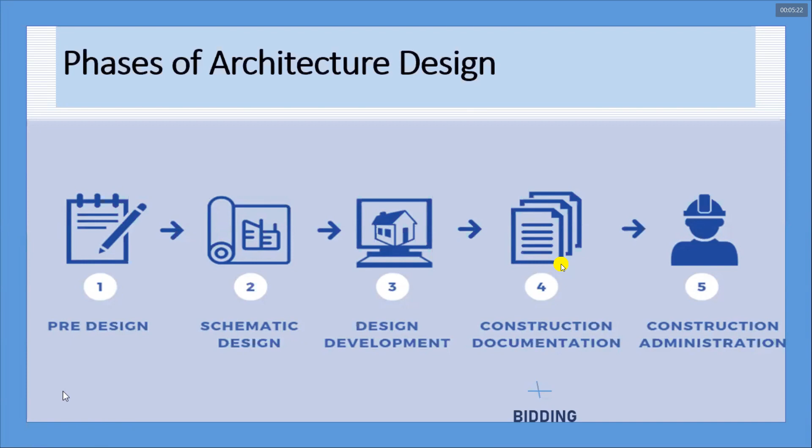Okay, so who are the stakeholders that the architect needs to collaborate with? He needs to collaborate with the client, engineer, and builder. The engineers are involved right from the start of the third phase, that is design development, construction documentation, and construction administration. But the builder or contractor is involved in the last two phases, which are construction documentation and administration.

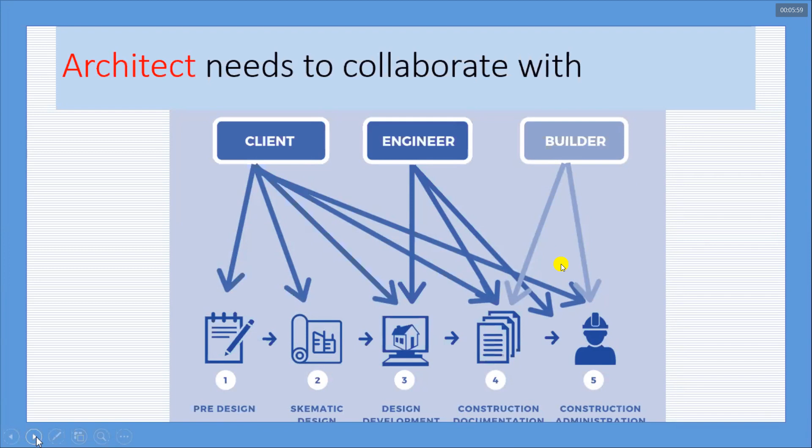So apparently the flow seems very simple and straightforward, but the truth is that the stakeholders involved in each aspect of the process have different thoughts, different perspectives, different expertise that are necessary to create a successful product. So it is not possible for them to design individually. All of them have to understand the significance of the profession of other consultants, and they have to manage all together to make a building successfully executed.

So let's define the phases one by one. The scope of the project will be reviewed. The program and analysis of the site is actually part of the pre-design phase. Zoning requirements is the new term. Zoning requirement means that if there is any plot or site on which you have to execute your building, you are supposed to zone that plot initially, according to your requirements.

For instance, you have to find out where to locate your building, on which part of the site. Then you have to locate where you want to add the parking area, where you want a lawn area. So all these parts are used as a zone. So you have to divide your site into different sections.

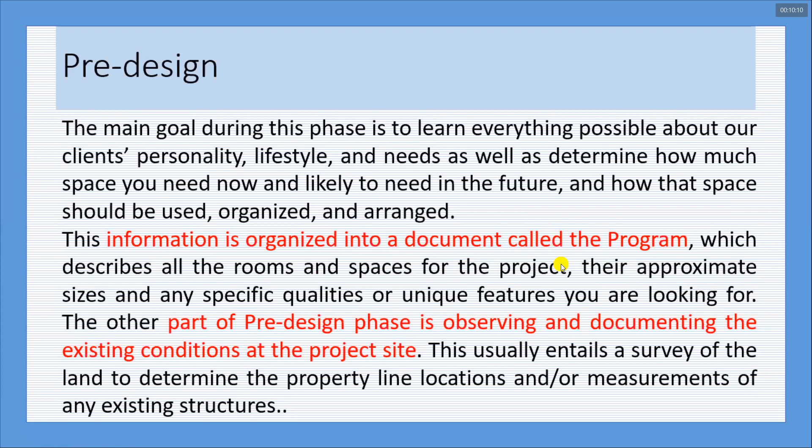So the main goal is first of all to gather information about the client, his personality, living style, his likes and dislikes regarding any space quality, arrangement of spaces, and what are his future perspectives about the design. This information is then organized into a document which is known as the program. It describes the standard sizes of rooms and spaces. It also provides any unique feature.

For example, if someone wants to add an aquarium or an open green area or a patio to their living room, it's a unique feature that you have to add. So such preferences are added in the design. This phase is observing and documenting the existing conditions of the site. For example, demarcation or measurement of the existing structure within the site.

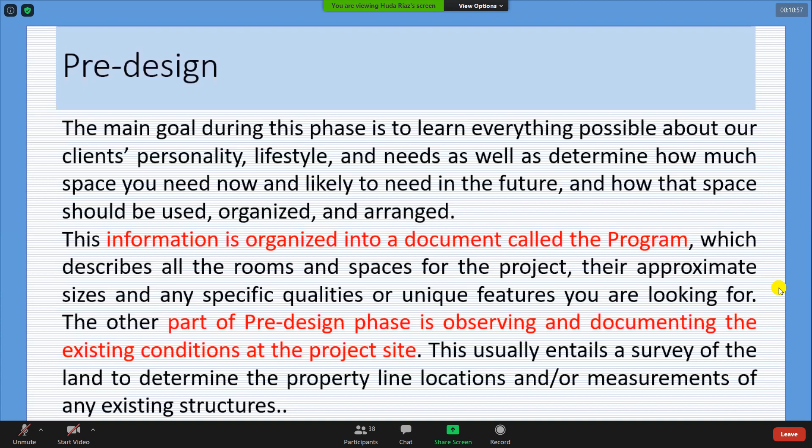Then analyzing the surrounding area, climatic condition, the local people living in the surroundings, rules and regulations that affect the project, for example, height specifications of the building, or according to the site, you have to see the bylaws. Then you track the zoning summary. We have already discussed what zoning actually is.

Then you have interviews with the client to understand in more detail what he actually demands, and sometimes you give him home assignments as well so that you can better understand and design in a better way what he actually demands.

So here we have deliverables. Deliverables are actually PD deliverables. They show what documents you are collecting by the end of this phase. And the next, PD duration, is the time you require for the completion of this phase, that is roughly 1 month or 2 to 4 weeks.

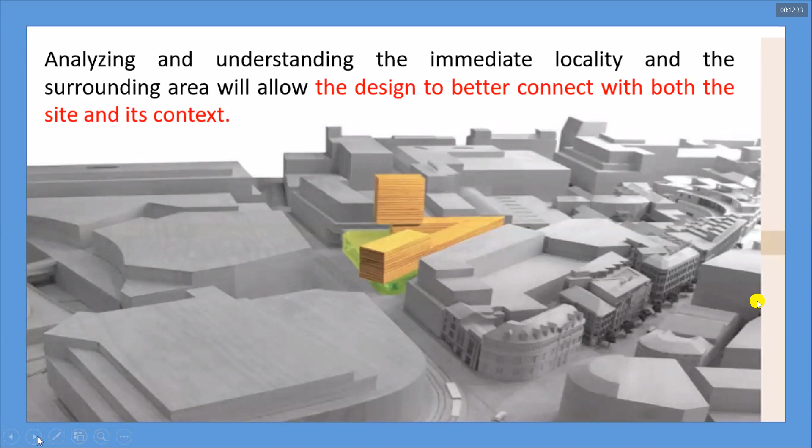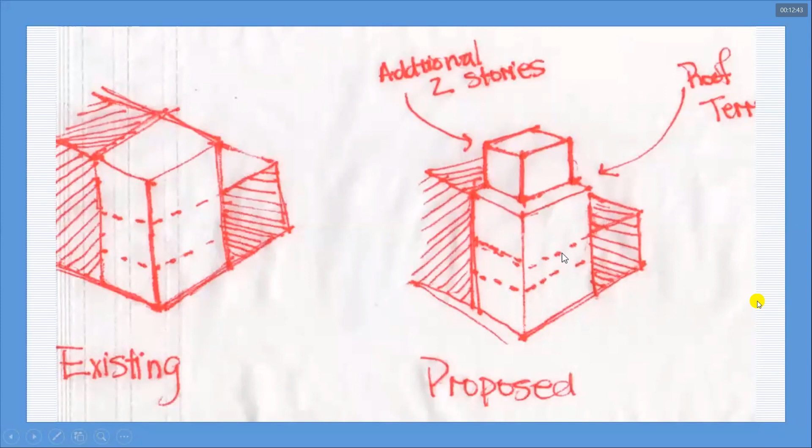So the next phase is schematic design. After the architect's preferences, the process enters schematic design, where he explores the chosen concept in more detail. Here, the architect will develop plans, sections, elevations, and draw them at a particular scale so that it can be seen that the program and the site have a good relationship with one another. Then you evaluate how your building will actually look by the end.

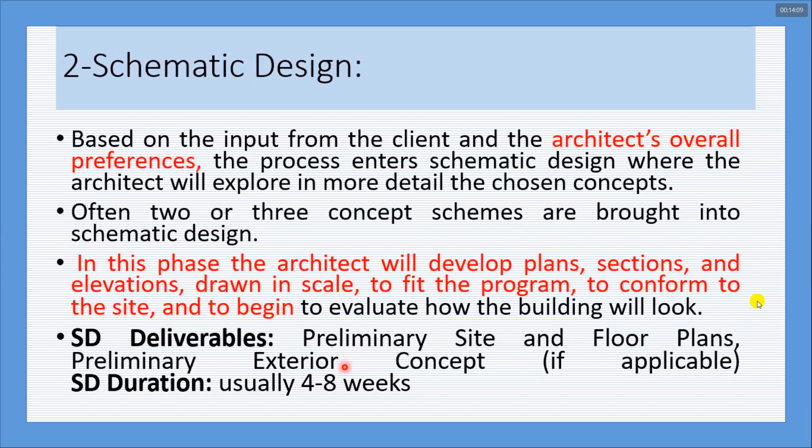In this phase, you deliver an initial draft of the site, an initial draft of floor plans, even the basic exterior concept of how your building will look, and it will take mostly 4 to 8 weeks. Sometimes you find perspective drawings. They are handmade 3D drawings, or sometimes, for the client's better understanding of the building concepts, you provide simulated 3D models so that he can explore the process in a broader way.

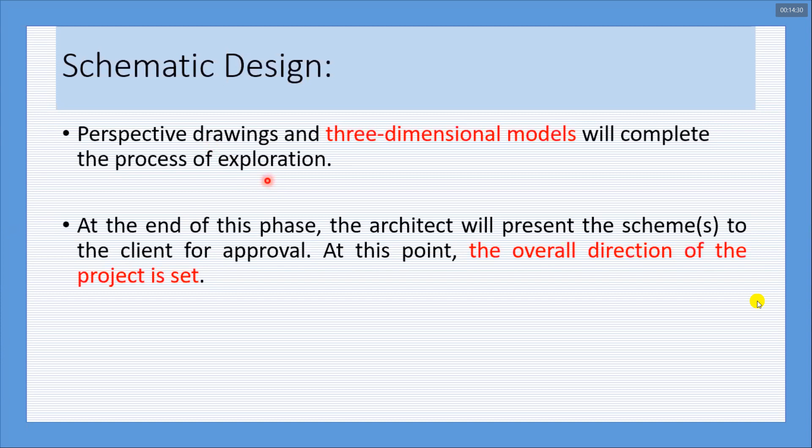At this point, the direction of the project is very legible. From what you gathered in this phase regarding field surveys, you make alternative designs. From those alternative designs and sketches, you visualize what will be the route or pathway for your project to take off further.

And after that, you discuss the budget constraints and aesthetic preferences of the client, and you almost finalize your design, the selected option, and you refine that selected option in the next phase, which is known as the design development phase. Here you set all the specifics of design. All the detailed dimensions are provided on the plans.

Particular materials are chosen. Fixtures involve things like a wash basin or shower cabinet within the bathroom, or a sink area in the kitchen. All sorts of fixtures and equipment are documented, and you decide what you are going to install in your building. Here you have to work with a number of consulting engineers like civil engineers, structural engineers, mechanical consultants, lighting consultants, etc.

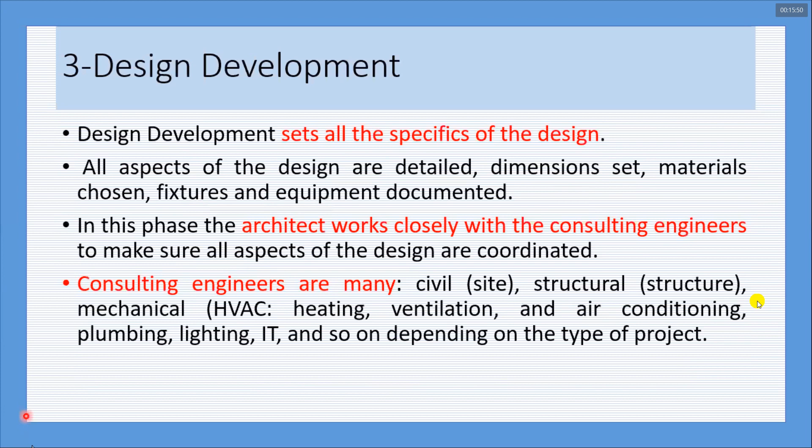So in the design development phase, depending upon the size of the project, sometimes architects roughly estimate the cost on the basis of their experience. But most of the time, for large scale projects, he requests a cost estimator to provide a comprehensive cost estimation so he can see that his proposal is within the limitation of the budget provided by the client, and make sure that all aspects are well covered and meet the budget demands.

So by the end of this phase, you get rendered plans and drawings, presentation drawings, presentation 3D models, as well as some specifications of the detailed building design. This process takes 8 to 12 weeks for completion.

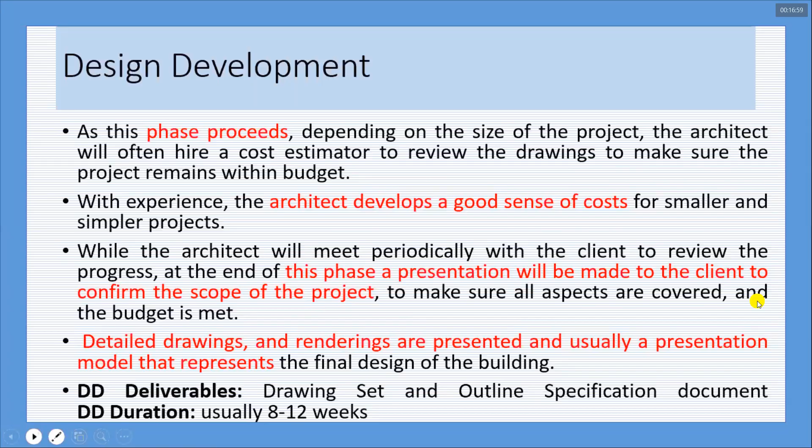Here we have a list of other consultants involved within this development phase. Sometimes you require landscape architects, architectural plans, foundation plans from the structural engineer, mechanical drawings for HVAC, plumbing details for water supply and drainage, and electrical drawings for lighting and illumination within the building.

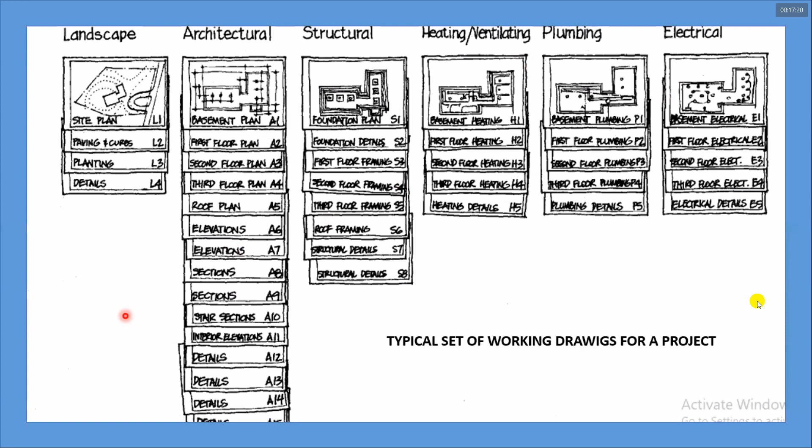Then the construction documents. This is one of the longest phases for the architect. All aspects of design must be detailed, and all aspects of the scope of the project should be well documented. On the basis of these, contractors will place their bids, so anything omitted will not be covered in their bids. So if you miss any detail in your drawings, the contractor misses that in the bids. And once you request your contractor to add the missing detail, he will charge you once again.

So to avoid such discrepancies, you have to provide a complete project to the contractor so that he can place his bid complete in all respects. Then the contractor uses the drawings to build and execute. He simply prepares execution drawings. The drawings are approved by the architect, and from there the execution process begins.

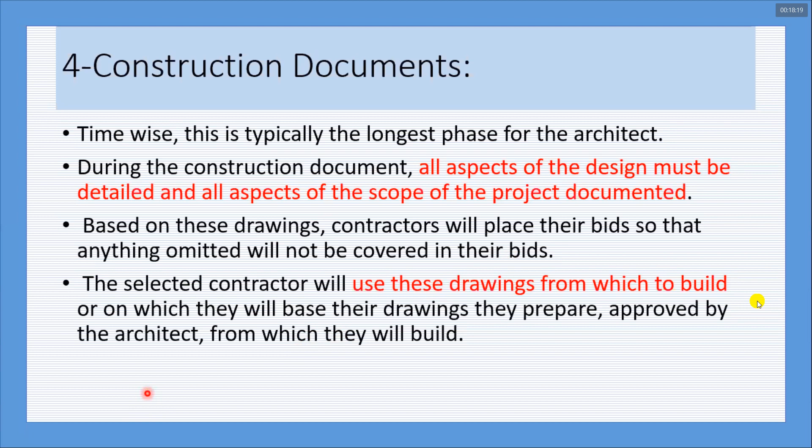The next process is building permitting. Building permitting is just like asking for a license to build a building on a particular site. It might be regarding land uses; land uses are again the zoning scheme on your project. Then energy codes, for example, the site has bylaws that you have to produce some energy from the constructed building in the form of solar panels or any other form. Or you have to conserve water by adding a conservation technique.

These drawings are then forwarded to building authorities, like the Lahore Development Authority (LDA), and they will issue the permit. Most of the time, many projects are in progress, so they have to review your drawings. It will take time. They will ask for further clarifications and information if anything is missing.

Then sometimes your site presents constraints. For example, there is a historic dome near your building, so within around 100 feet, you are not supposed to construct anything that will create vibration in the structure or affect its historical value. So every site has different constraints. This is a lengthy process; it takes around 12 to 24 weeks.

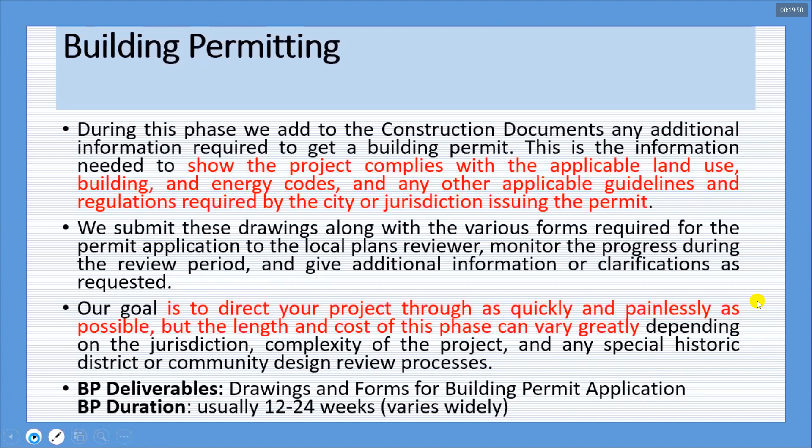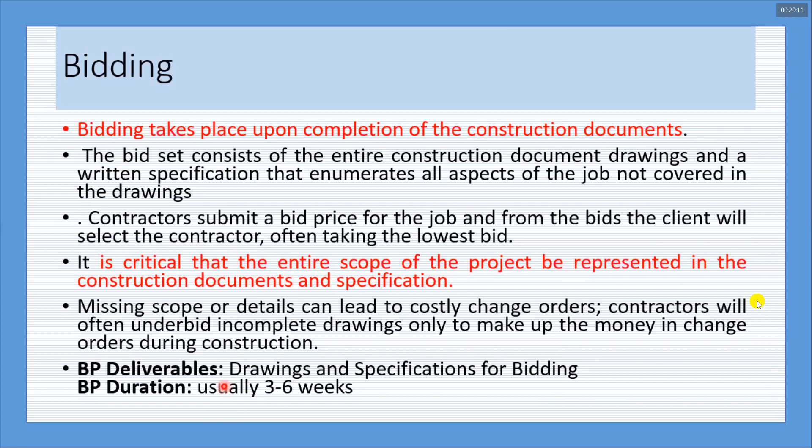So drawings and specifications for bidding. This is delivered in the bidding process and it takes around 3 to 6 weeks. So why during the bid process do you want an architect at your side? First, he will provide you a list of qualified contractors for bidding. Second, he will review the submitted drawings and tell you whether the existing drawing is according to the proposal you have provided. He can compare the cost figures. He is just assisting the client at his side.

This phase ensures that contractors considered for your construction project are reading your blueprints correctly and are providing an accurate bid for your project. So initially, the architect is the main coordinator, coordinating with different consultants like acoustical, mechanical, municipal, structural, and lighting consultants, along with the owner and later your contractor. He coordinates with the subcontractors, material suppliers, financiers, insurance, and your labor as well.

So the construction phase for the architect involves reviewing contractors' bidding drawings or shop drawings and on-site observation to confirm that what is being built conforms to the design intent. The architect plays no role in how something is built, only in what is actually built. So finally, we are moving towards the last phase, that is construction administration.

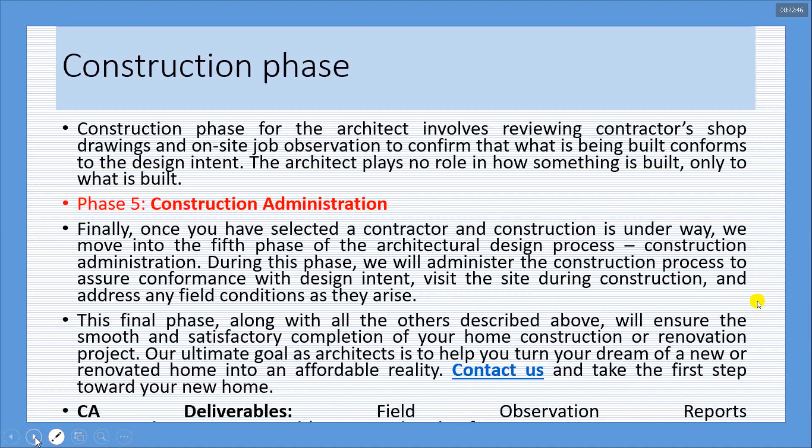So the final phase, with all others described above, will ensure the smooth and satisfactory completion of your project. You can contact us and take the first step towards building your new house. So, field observation reports are the requirement from this phase.

Let's summarize the lecture. Initially, we started the lecture with the five phases we are going to discuss here. The first phase is regarding the research. The second phase is regarding design and documentation. The third phase regarding pricing, and the last phase is about constructing.

The next phase is the schematic design. It takes around 4 to 8 weeks. This is when we start exploring your design concept. It is the time for testing options and getting a general idea of the look and feel of the building. What does it involve? It involves sketches, 3D models, conceptual relationships, feedback of the client, design refinements, and preliminary documents like floor plans and exterior concepts that will be ready for final development.

By the end of this phase, the design development, the building is fully designed: the interior and exterior layout, the fixture details, dimensioning, all features, and selected materials are complete. So it's a very milestone phase where all advancement and refinement is done, and here you coordinate with all the relevant consultants along with the cost estimation and value of the project.